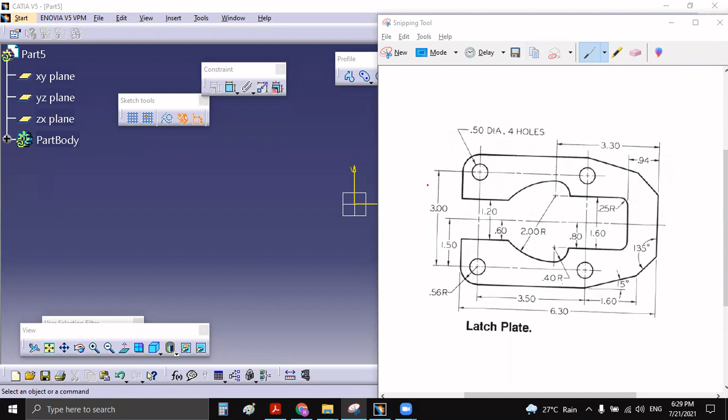Here I am coming with one more sketch, that is latch plate. So this is the sketches series. We are continuing with four more sketches in this series and then we will start with part design. So if you just see this, these dimensions are too small, so we are going to consider 1:100. So instead of 6.30, we can consider that as 630, 350 like that.

Okay. So just go through this horizontal axis. The above part and below part are symmetric to each other. So we'll draw the below part only and then we will mirror that to the top portion. Okay. So let us start. How to draw this? I'm going to consider this point as the origin, and then I'm going to draw this profile first, then these two holes, and after that, I'm going to mirror this to this side.

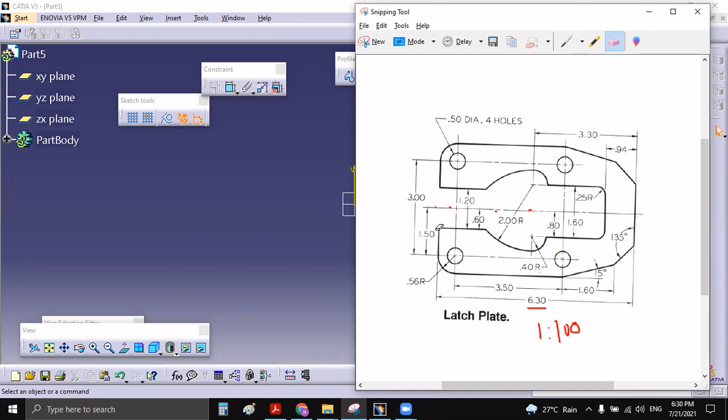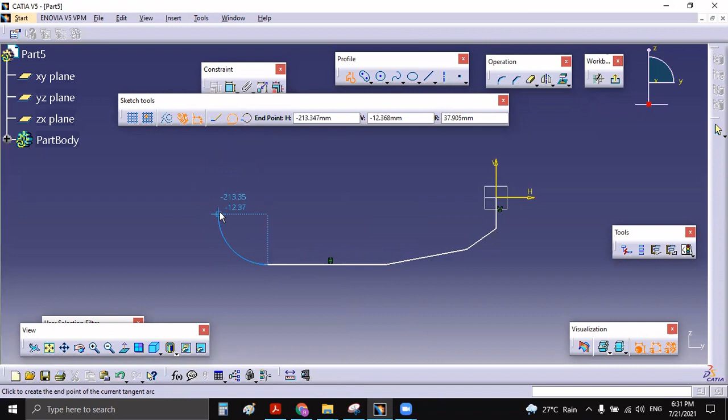So just draw a random profile: one straight line, then incline, one more incline line, horizontal, then arc like that. H, one incline line, one more incline line, then horizontal line, then arc like this. With the help of this sketch tool, we can use this arc command. We have seen this in one basic video. If you have not seen it, just go and check that video. All the commands of Sketcher have been covered there. Then it will be like this. So randomly we have drawn this arc, or profile we can say.

Then just give dimensions. So this angle is 135. Sorry. Angle between this and this is 135. And now with horizontal, this angle is 15. Yes, correct. And this is 56. Correct.

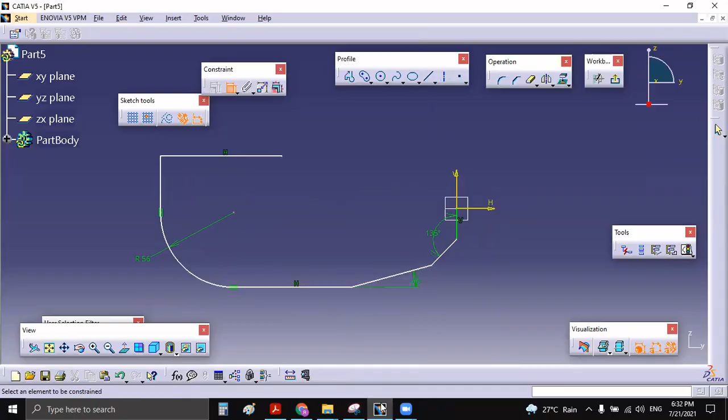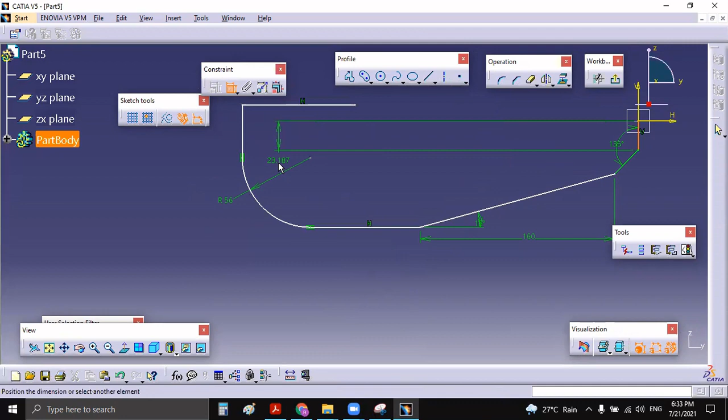So from this point to this point, this horizontal distance. If you want a vertical distance, just right click here and select a proper alignment of the dimensions. If you just see this, it is 160. So this distance is 160. Just double click and mention here 160. Now from this end to this end, it is around 630. Again, go here. From this to this, it is 630, like this. Correct?

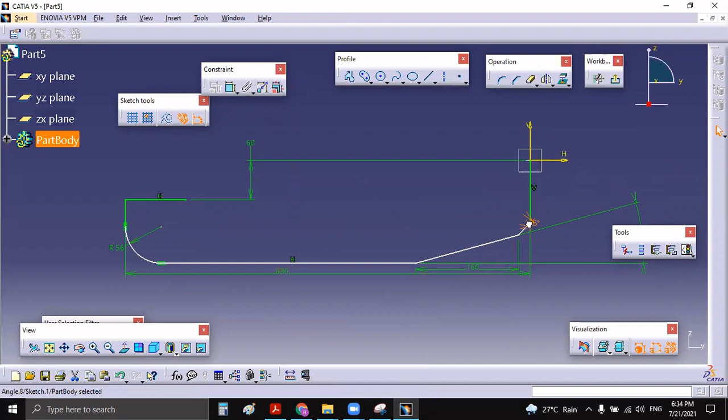Yes. Now, if you just see this, center of this 56 is around 150 from this horizontal position, and this distance is 60. Okay. So it is like this. So from this, it will be 60. Yes. So still we haven't given the dimensions of this. Like this. Okay.

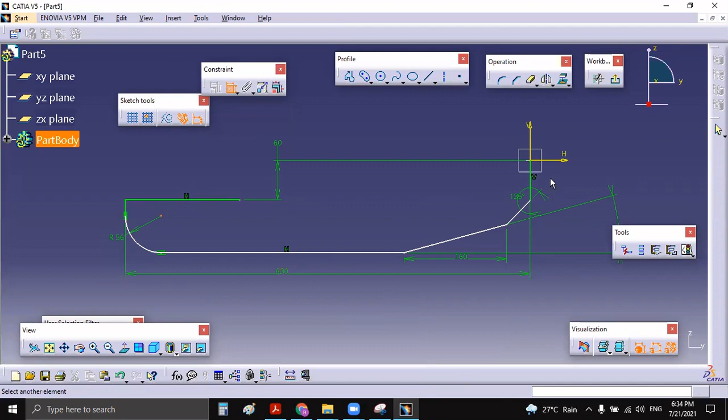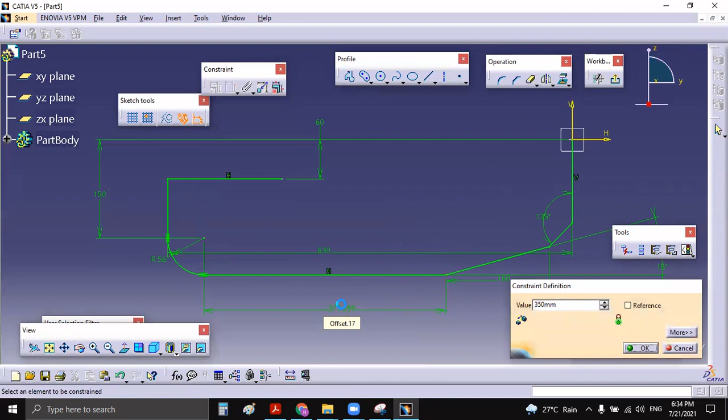Now, if you just see this, center of this is around 150 from this. That is 150. Correct? Yes. Now, between this and this center, the distance is 350. So again, go here from this point to this point, it is 350. You can select horizontal measure distance, and here you have to enter 350. Now this is fully constrained, correct?

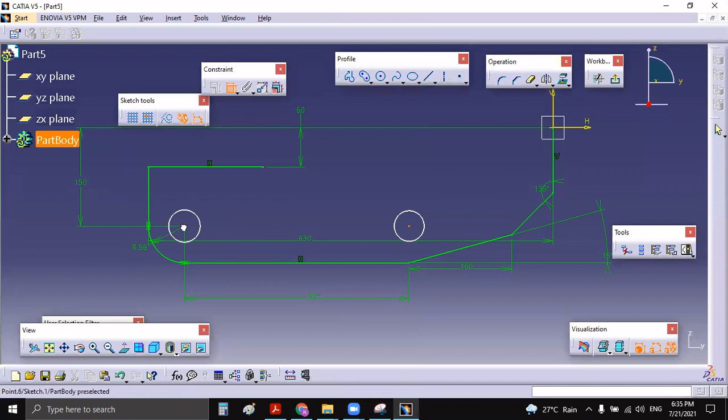But some part is still left. So you need to draw one circle here. One more circle is there, which is exactly at this position. Just give the dimensions of those two circles. The small circles are of 50 mm diameter. This distance is already known. So just give 50 mm diameter, that means 25 mm radius. 25. Again, you can define this distance as 150. Correct. So we have covered the part up to this one.

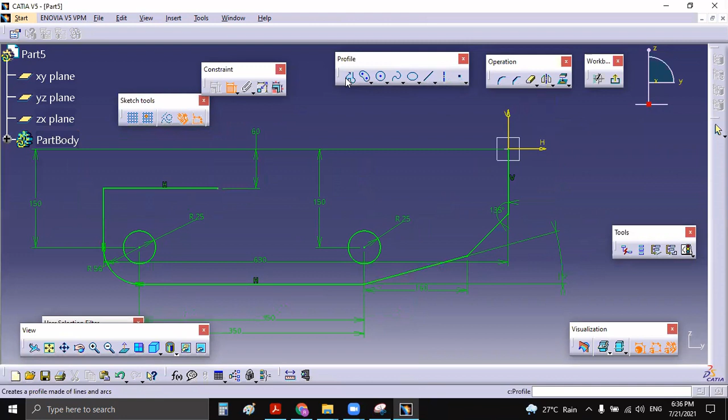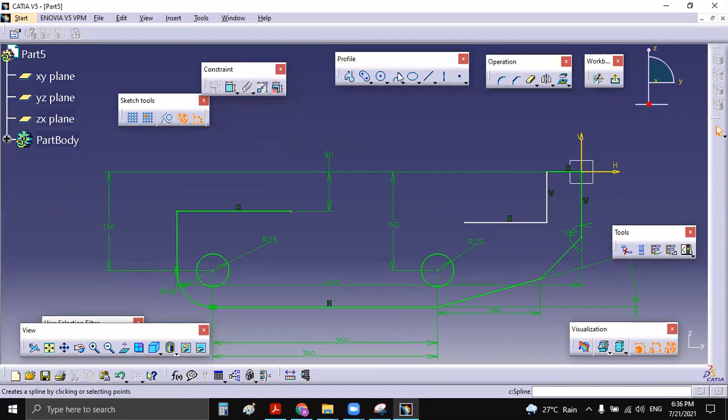The next part is this. This line should be this, then like this and like this. So let us start. Then one circle is there which is going to be coincident with this line. So I have drawn this R40 circle. Now one more circle is there, which is 200 radius, coincident to this point and tangent to this one. So draw one more circle, coincident to this point, and also tangent to this circle, just tangency.

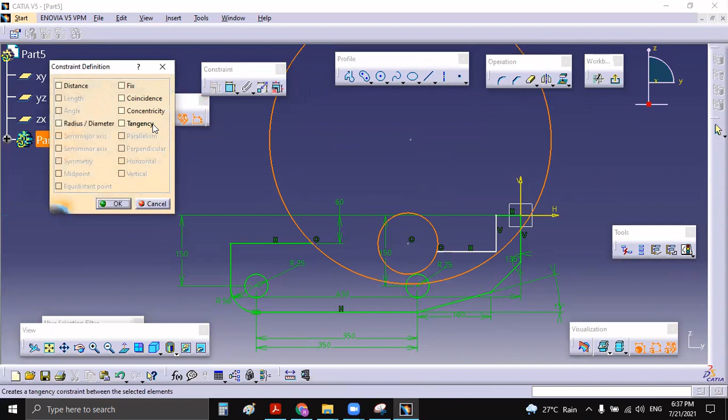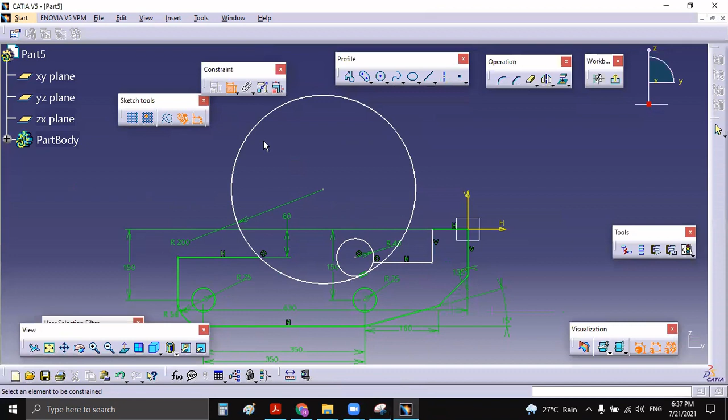Now you can give the radius of both circles. This one is given as 40, and this one is 200. So just double click here and make that 200. Now you need to define the center dimension. This center is at 80 mm. So from this distance, this edge is 80, and also this circle is 80. I have deleted that coincidence because it is 80 mm from this horizontal axis.

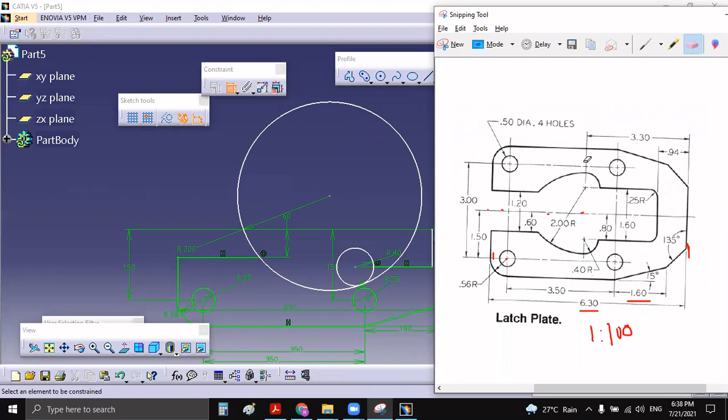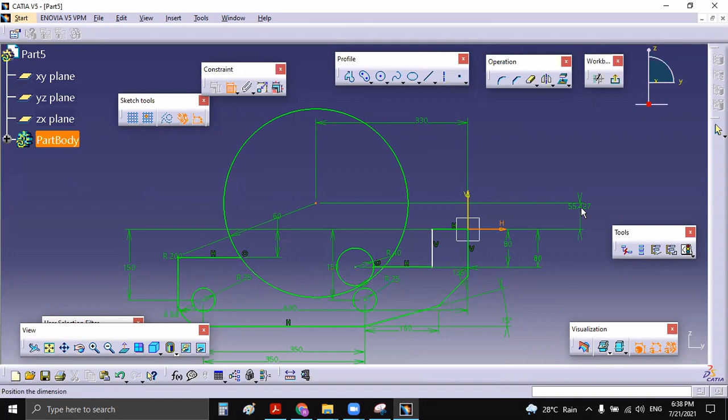Yes, correct. Now you need to define this 330 from this edge. This pink line denotes the over constraint. So from this to this, it is 330, and from this to horizontal axis, it is 80. Now one last dimension is remaining, this distance, it is 94. So just give that 94. Correct. Now we can trim all unnecessary parts.

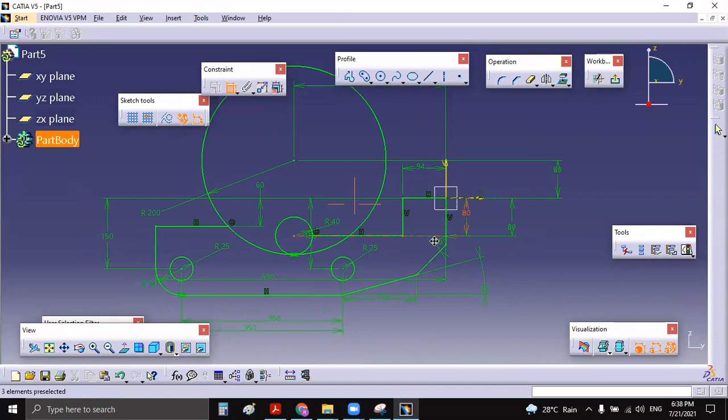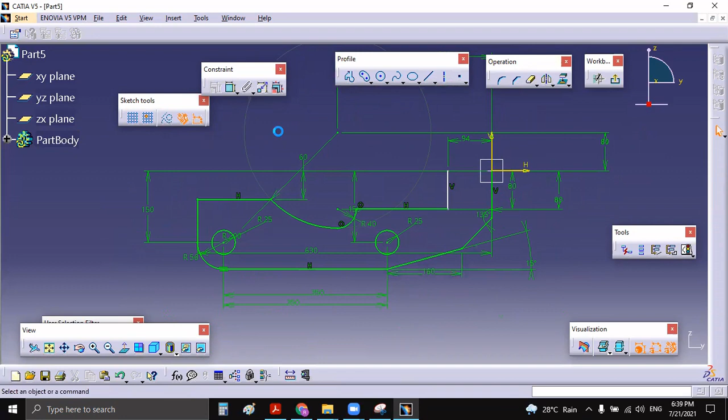So just double click here. We don't require this, oh sorry, this R. Also, we don't require this. Now we can give the dimension of this line from this one. 94. Now just select this and mirror this about this horizontal axis. So now just see, we have completed this part totally.

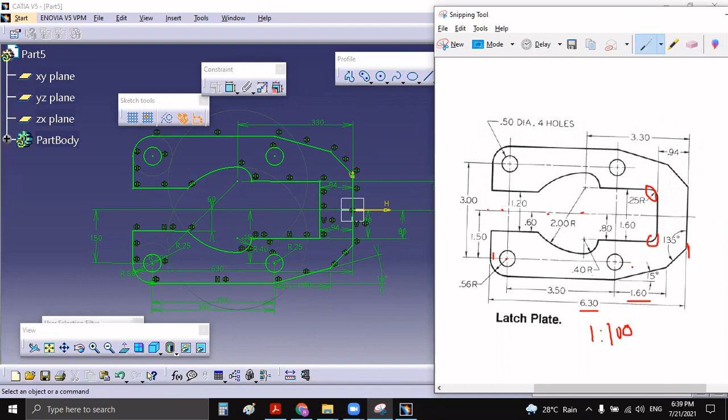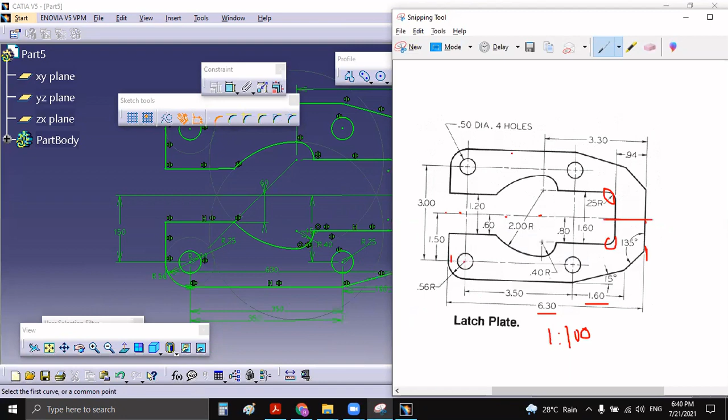Only this fillet of R25 is remaining, this fillet and this fillet. So just go to fillet, double click here and mention R25. Select this line, and again use 25. So hopefully you understood this. We have drawn this outer profile first, then this middle circle, and we have mirrored it about this horizontal axis. This is how you need to start from one corner with the origin, consider all the orders, and implement whatever shortcuts we can use while drawing.